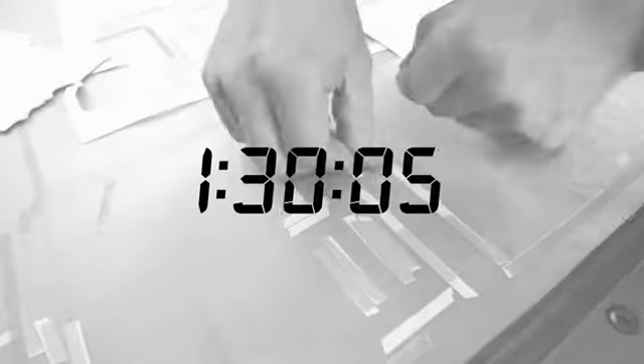Cutting die plate pressure adjustment has always taken forever, and of course, that means time spent with the machinery not running. Today's work took 1.5 hours of adjustment time. Does this sound familiar to you?

We got tired of just accepting conventional thinking, so we developed a brand new way to cut pressure adjustment time by 2/3, using our incredible press balance technology.

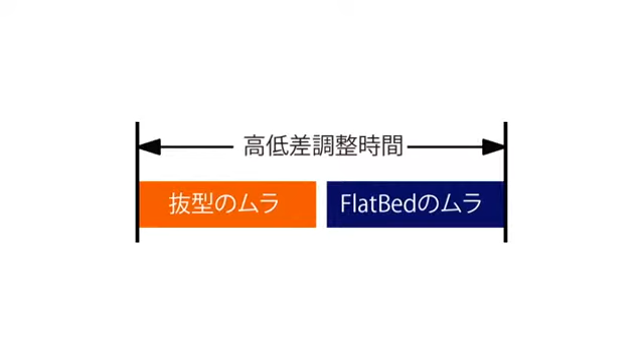When do you need to compensate for unevenness? There are 2 sources of unevenness, the die and the machine. Our research found that the majority of adjustment prep time was wasted on unsuccessful compensation for the unevenness of the cutting machine's flatbed. Reducing this setup time would lead to a significant increase in factory floor productivity, while driving down costs for any die cutting operation.

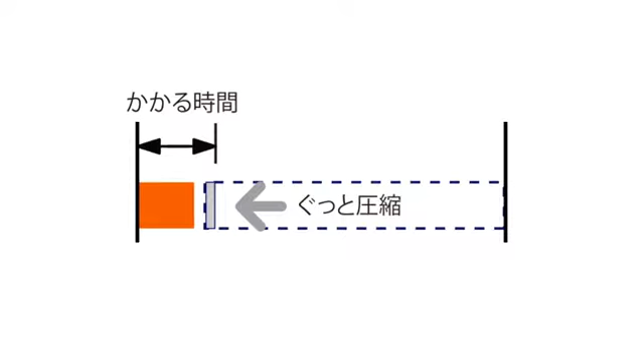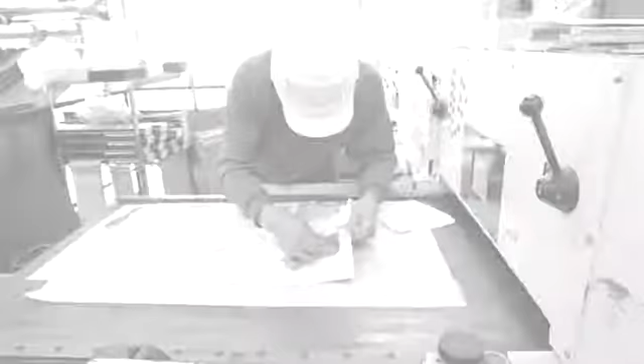Don't you agree? For example, suppose that the average adjustment prep time for a new die took 30 minutes. If you use 10 new dies a month with your cutter, that's 300 minutes, or 5 hours spent making adjustments each month. If each hour of that time could be spent doing 5,000 die cuts at 5 yen apiece, that's a potential 125,000 yen lost each month.

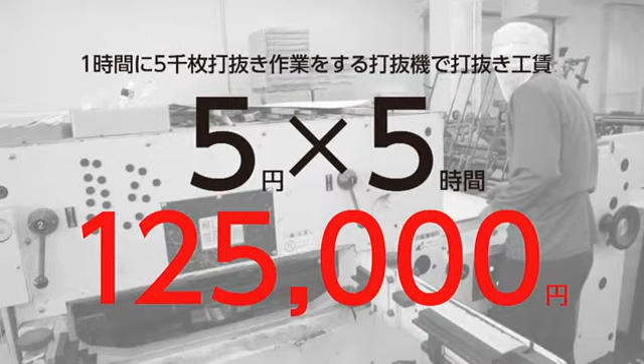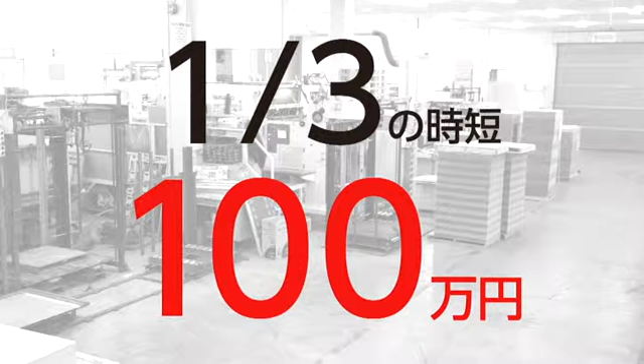Over the course of a year, that's 1.5 million yen's worth of potential production lost. With our press balance technology, this prep time is cut by 2/3, letting you get back a million yen's worth of lost product time each year. And that's just for a single machine. If you have multiple die cutters, your savings could be even greater.

Have you ever stopped to think about just how much potential production time you've lost over the years? Our press balance technology will help you change that.

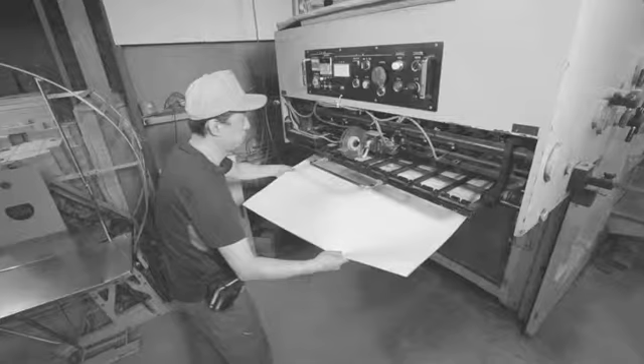First of all, we asked ourselves, why are die cutter uneven pressure adjustments necessary in the first place? Of course, if you run a die cutting press for a long time, various things will cause the flatbed to develop surface unevenness. And nothing is more difficult than accurately making the precise micro-adjustments needed to make the flatbed surface perfectly even.

We had a theory that uneven cutting pressure isn't caused by unevenness in the dies themselves, but because the flatbed surface itself has bumps and dips rather than being totally flat. And of course, if you adjust the height of the flatbed, then each cutting die's adjustment has to be done again. It became clear to us that this was a huge source of production inefficiency.

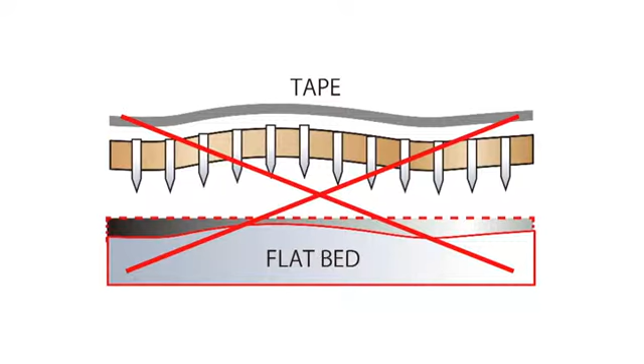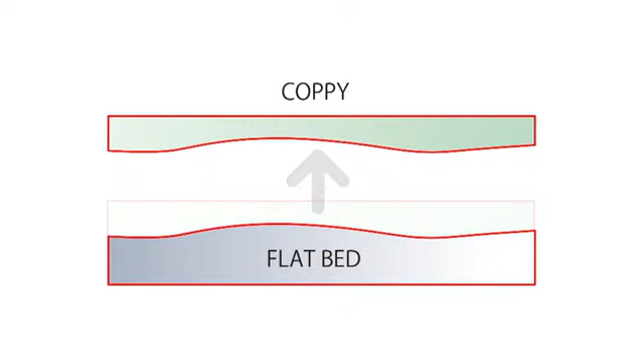There must be a solution, we thought. There must be some way to stop this problem at its source. And the idea we came up with was simple. We would trace the uneven cutting pressure. If we could just trace the unevenness of the cutting die pressure onto something else, and then invert that, maybe it could cancel out the unevenness. It was the moment we had this realization that our press balance sheet was born.

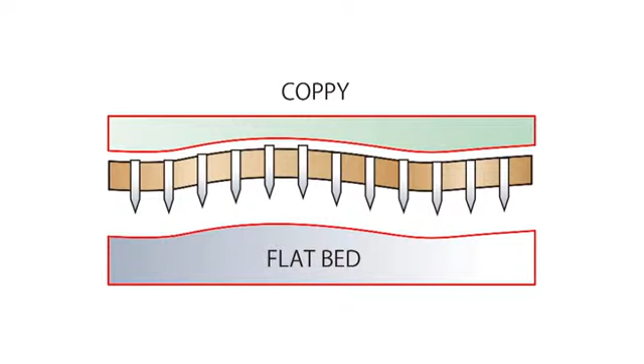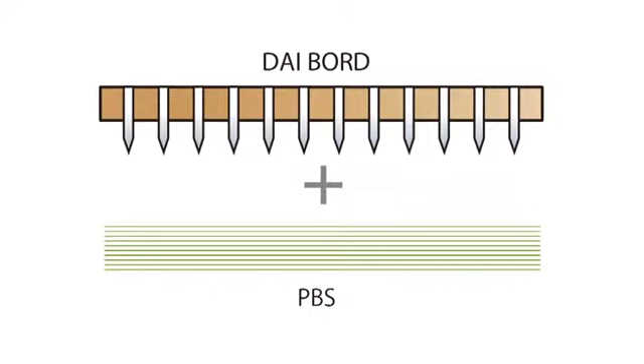We tried every possible way to trace the uneven pressure in order to get it right. Our breakthrough came when we used 10 thin layers of film with a specialized cutting die, allowing us to precisely trace the uneven pressure. People used to think that pressure adjustments required precise microscopic measurements of the flatbed height. But with our press balance technology, there's absolutely no need for any of that, and no need for a specialist.

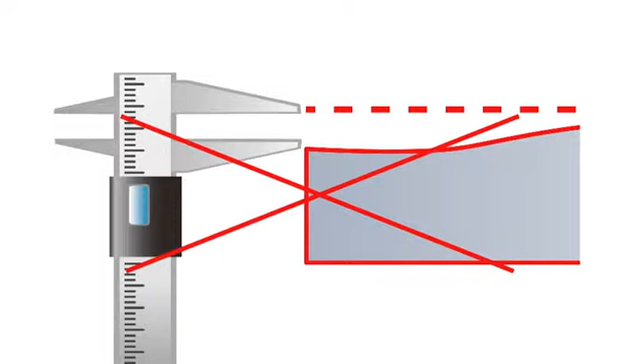Anyone can do it. Here's how our press balance sheet works. Put our press balance sheet setup die into your die cutter, then place the layered press balance sheet layered film on top of the flatbed. The layered film consists of 10 20-micron layers totaling 0.2 millimeters thick.

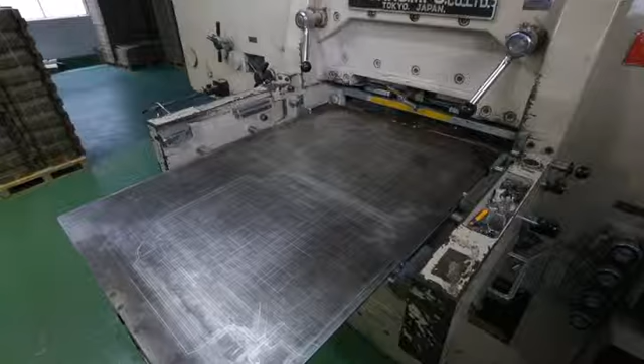The layers are held together with a gentle adhesive. This 20-micron film is from the world's toughest resin, developed by the Japanese resin maker Toray and used in aircraft bodies. Half cut the layered film.

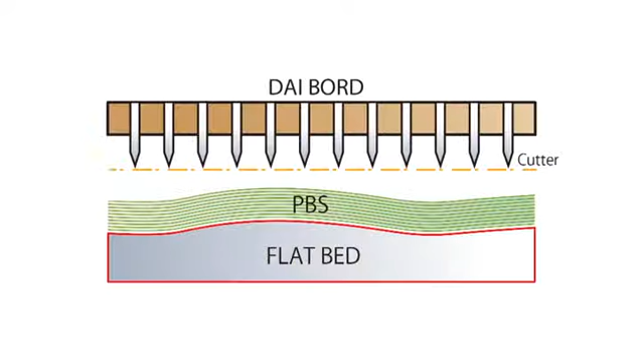Adjust the stroke of your die press cutter to cut partway through the layered film. The raised areas on your flatbed will have more layers cut, and the lower areas will have fewer layers cut.

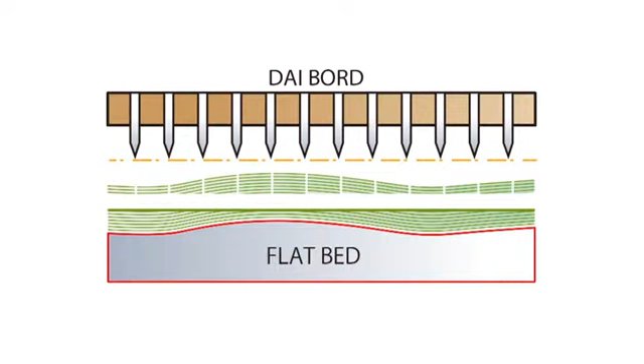Remove the cut film. After that, the cut film can be removed at 50 millimeters pitch. The uncut film can't be removed. The press balance sheet is complete.

Now, with your press balance sheet, you don't have to measure the height of your flatbed to get incredibly precise evenness across your flatbed. To increase durability to handle everyday use, cover both sides with the protective sheets.

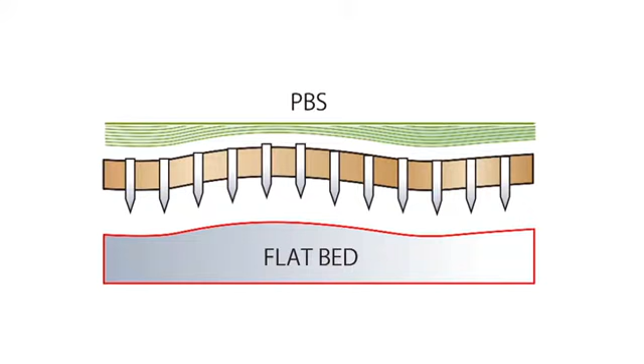How to use your press balance sheet. Place your press balance sheet inside its protective sheets on the back of the cutting die, then the die, and apply pressure adjustment tape as usual. The unevenness from the machine itself is gone, so all you need to adjust is the die itself.

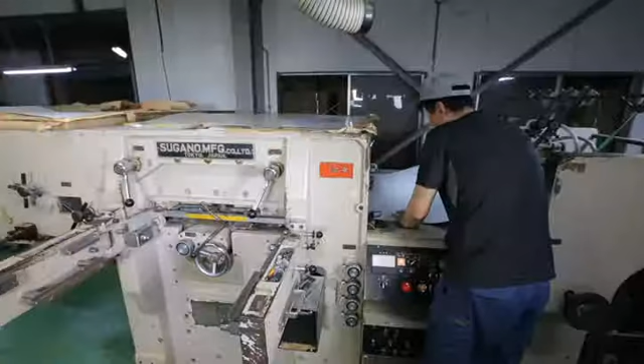The press balance sheet can be left inside of your die cutting machine. If you want to use your old adjustments for your dies, just take the press balance sheet out while you use them. So what do you think?

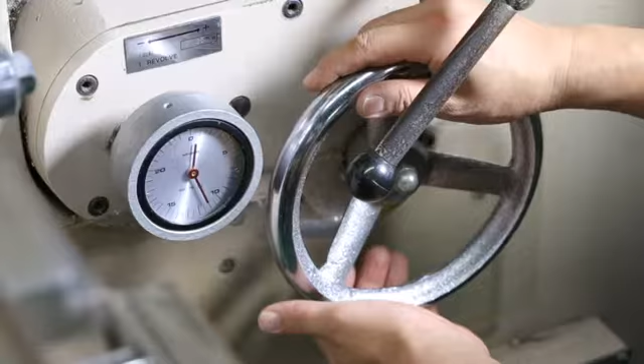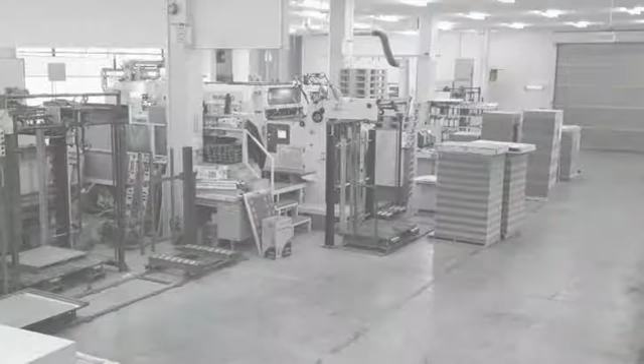With our press balance technology, the more cutting dies you have, the more prep time you'll save. Think of all the extra time you could be spending on your real work and all the lost production time you could have back.

The internationally patented technology behind our press balance sheet is being used for cutting dies throughout North America, Germany, and the rest of Europe, and all throughout Asia. The press balance sheet is helping increase production and reduce stress worldwide. At Counterplate Japan, our dream is to help make things better for everyone.